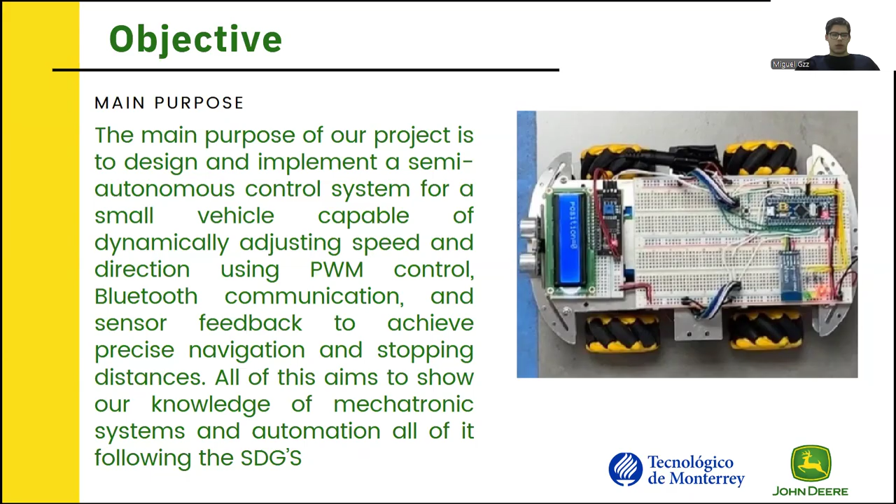The main purpose of our project is to design and implement a semi-autonomous control system for a small vehicle capable of dynamically adjusting speed and direction using PWM control, Bluetooth communication, and sensor feedback to achieve precise navigation and stopping distances. All of this aims to show our knowledge of mechatronic systems and automation, all of it following the SDG number 9.

Some of the challenge requirements as listed in Canvas are that the vehicle design must be a four-wheel scale vehicle using Ackermann or differential steering. The control system must include a speed control, Bluetooth communication, and real-time feedback and distance monitoring. For the automation part, it must have acceleration, cruising, and deceleration phases to reach its target distance. We will talk about this further in the future.

For its hardware configuration, we must use an STM32 microcontroller for regulating the sensors, actuators, and the data communication. It must have obstacle detection when following the triangle path, and it must be able to operate in manual and automatic mode.

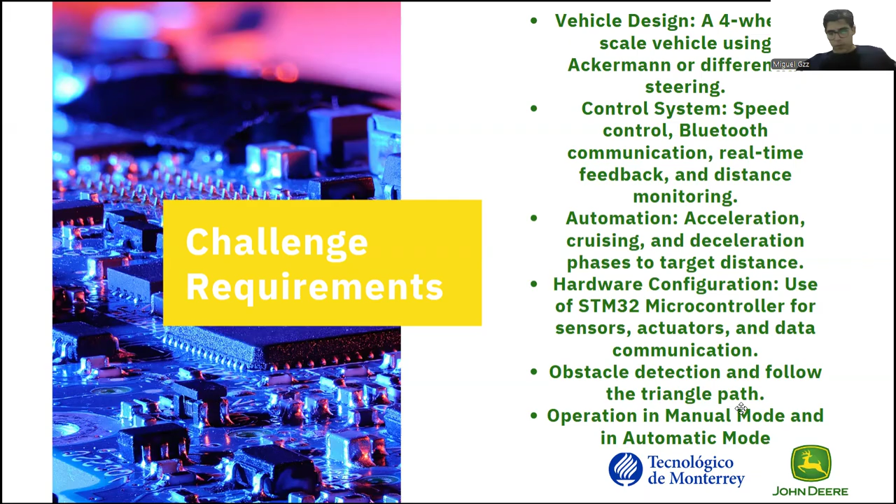So what is the proposed solution? This revolves around the development of a fully autonomous vehicle prototype designed to navigate independently. The system works with Bluetooth communication as well as multiple control loops through speed and direction adjustments. The vehicle operates autonomously in a pre-programmed trajectory while retaining the capability for manual control.

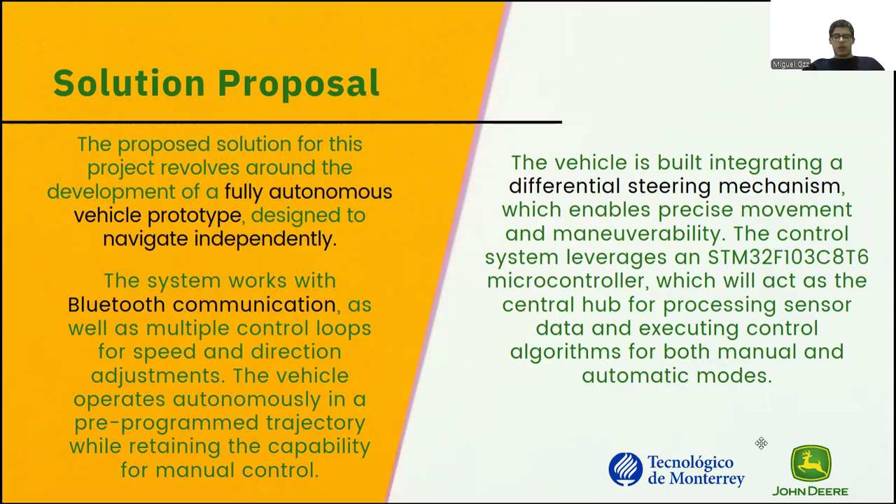The vehicle is built integrating a differential steering mechanism, which enables precise movement and maneuverability. The control system leverages an STM32F103C8T6 microcontroller, also known as the Blue Pill, which will act as the central hub for processing sensor data and executing control algorithms for both manual and automatic modes.

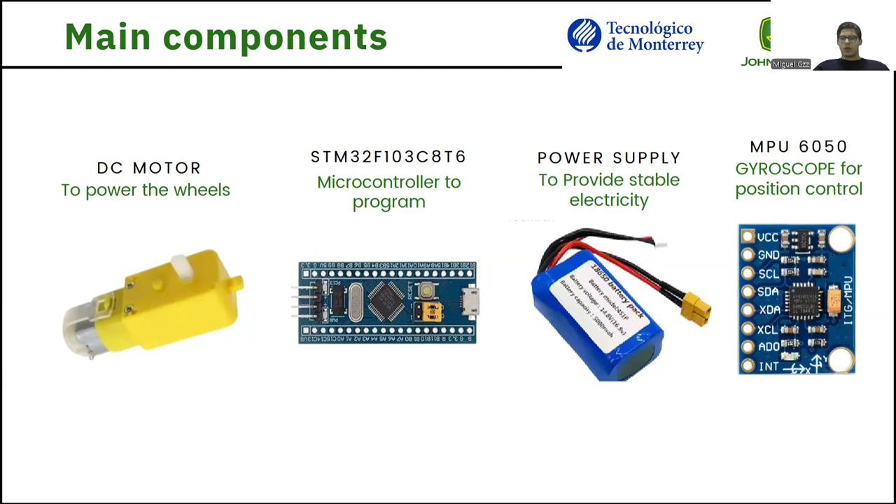We're using an MPU 6050; from the different components it has, we're only using the gyroscope for position control. We're using an LCD display for the display of variables like speed and position. We're using an HC05 Bluetooth module for communication, 2 H bridges to control the 4 motors in the car, one encoder, which wasn't very precise, but we used it nonetheless, and an ultrasonic sensor.

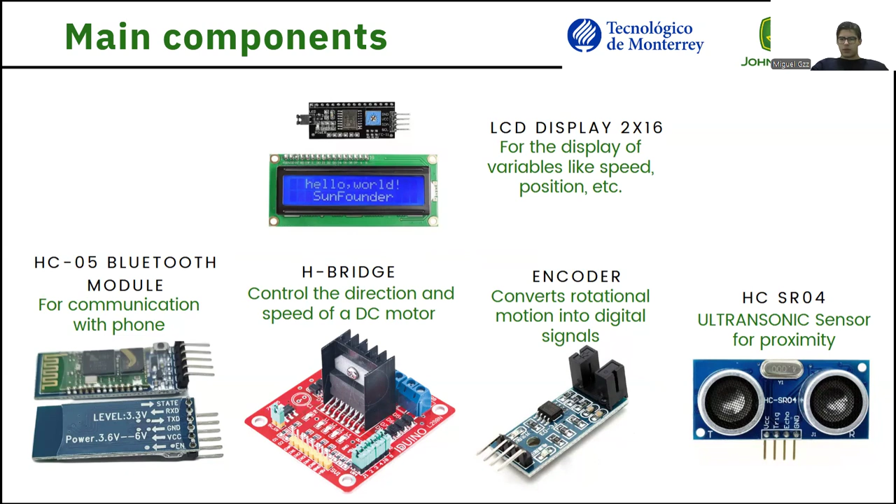This is basically the schematic. On the right side is a representation of the main circuit, for which in real life we actually use 2 protoboards because it's huge. And you can see an example of the connected H bridge, the 2 motors. As I mentioned, we have 2 of those.

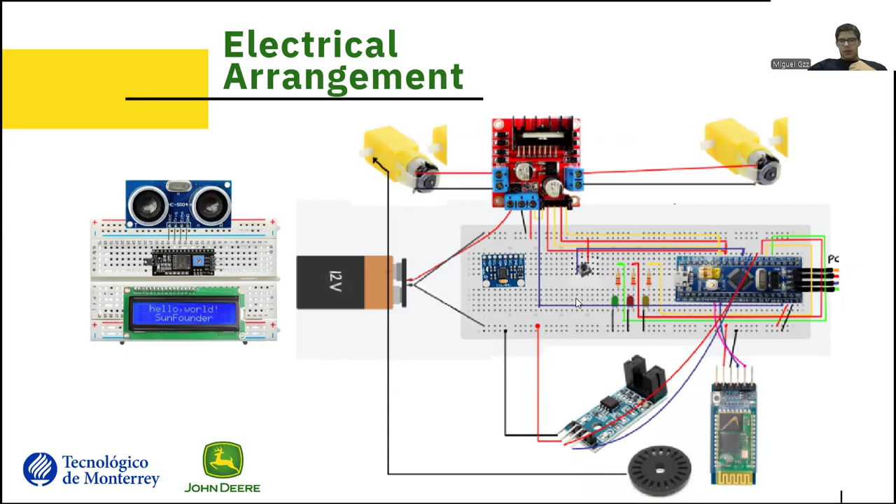Also the encoder, the 12-volt battery, how the 12-volt battery feeds into the H bridge, and the H bridge feeds the 5 volts into the system. We can also see the MPU for direction control, and we can also see right behind me the HC05 module. And on the left side of the screen, we can observe how the ultrasonic sensor and the LCD displays are connected.

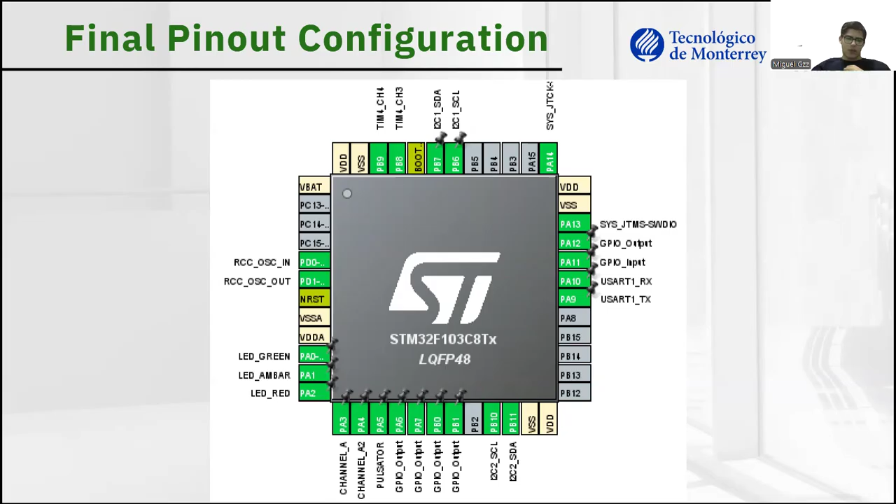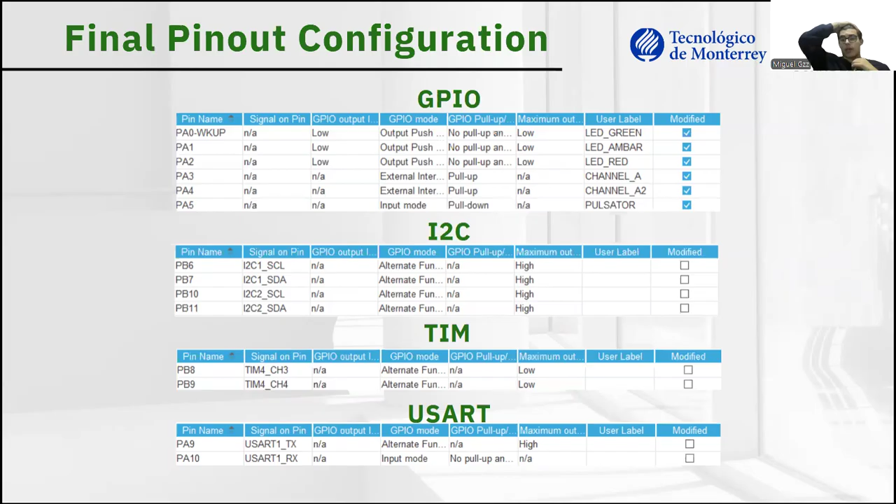This is a pinout configuration. I do not think it's necessary for me to go into detail as to what each pin does, but if you want, you can pause the video and check. These are the general purpose input output configurations for pins A0 to A5, and then the I2C communication setup for pins PB6, 7, 10, and 11. Then the timer configurations using timer 4, channels 3 and 4 for the pins B8 and B9, and the USART communication configuration for pins 9 and 10.

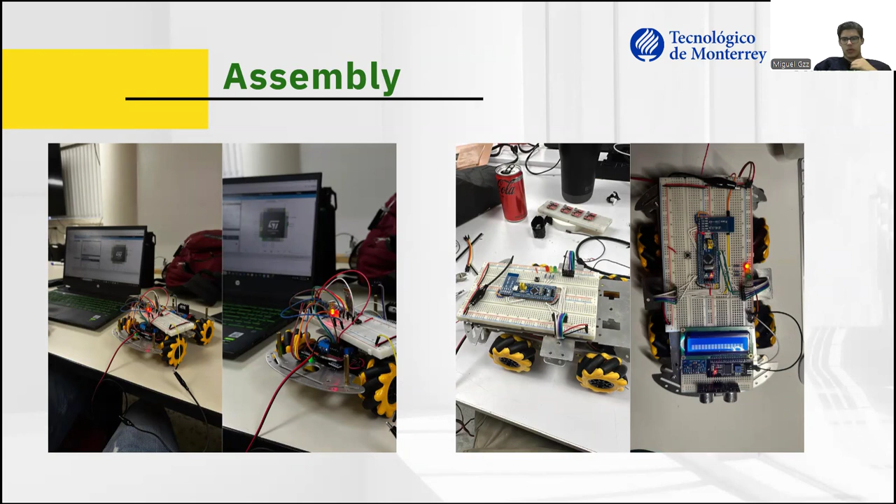These are some pictures you can check for the assembly of the car to kind of match up how it looks with how it's supposed to look. As you can see, we put a lot of effort into it.

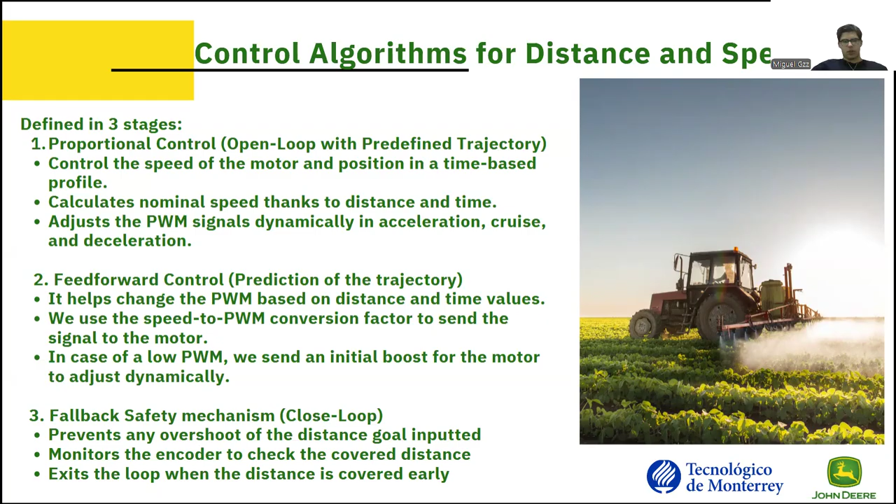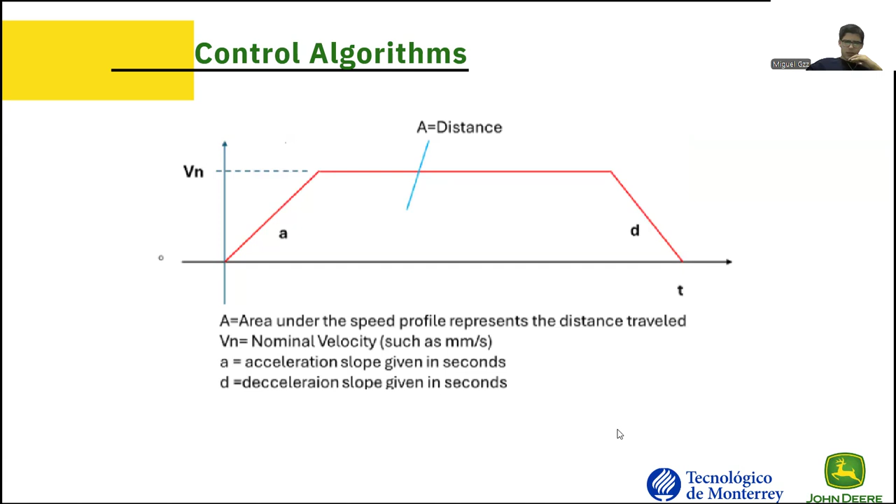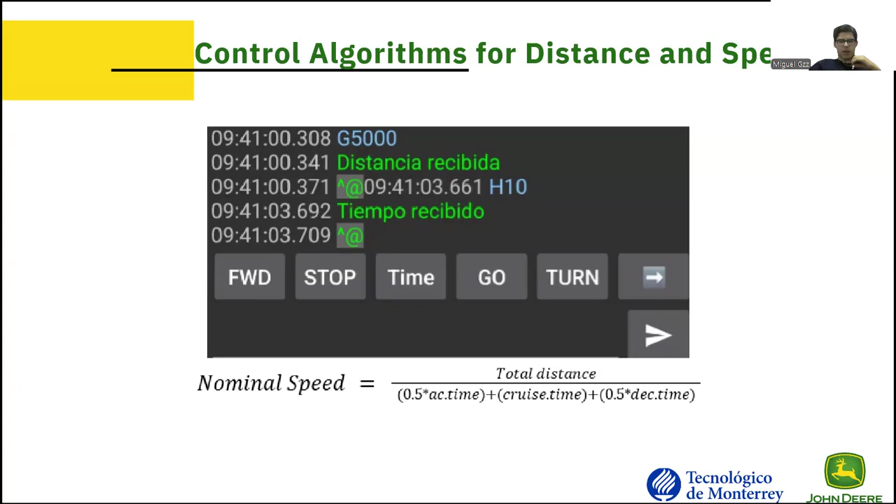For considering this trapezoidal speed profile, this is the formula that we use to determine the nominal speed: the total distance over half the acceleration time plus half the deceleration time, which happens to be the same in this case, plus the cruise time. This is how our trapezoidal speed profile actually looks when graphing the pulse width modulated signal for the motors.

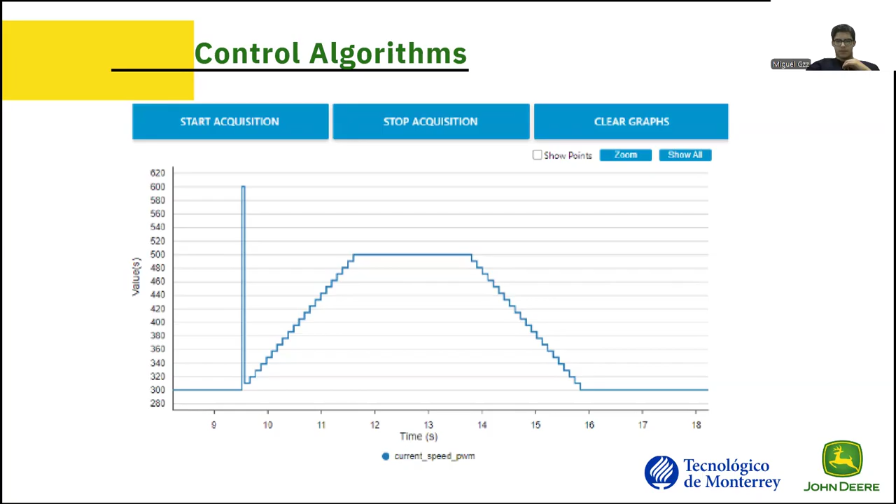As you can see at the beginning, there's a spike, a huge spike. That is in fact part of the program, and it's there with the intention of getting the car to move initially by just giving it a little boost, because we know that it's really hard to get the car moving at such low PWM signals. For example, like 300. It can be very hard to get the car moving, so we give it a little boost. And yeah, as you can see, it's pretty good. Then in here we have some videos which you can check directly with the presentation if you like.

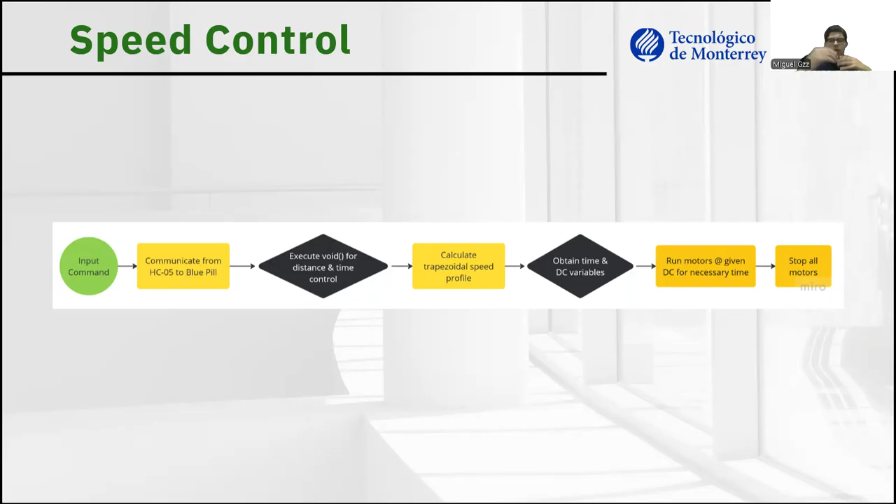This is a brief flow diagram for the speed control. Basically, we input the command, we communicate it from the HC05 to the blue pill. We execute the void for distance and time control. We calculate the trapezoidal speed profile with pure calculations. We obtain time and DC variables to run the motors during the acceleration, nominal speed, and deceleration phases. And then we run the motors and we stop all motors.

And then for the turn control, we have basically the same format. We just input a command for it to turn. It communicates the command from the HC05 to the blue pill. It executes the void for a 90-degree turn. It checks for the north with the MPU module, and then it activates the necessary motors to turn, which in any given case, if it wants to turn right, it will be the left motors, and if it wants to turn left, it will be the right motors. And it turns until the module says 90. If the module says 90, it stops. If it doesn't, then it activates the necessary motors to get to 90.

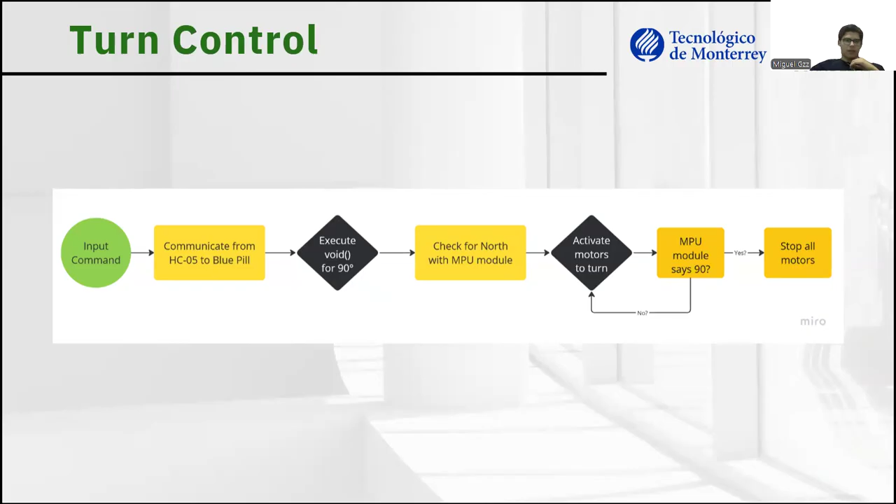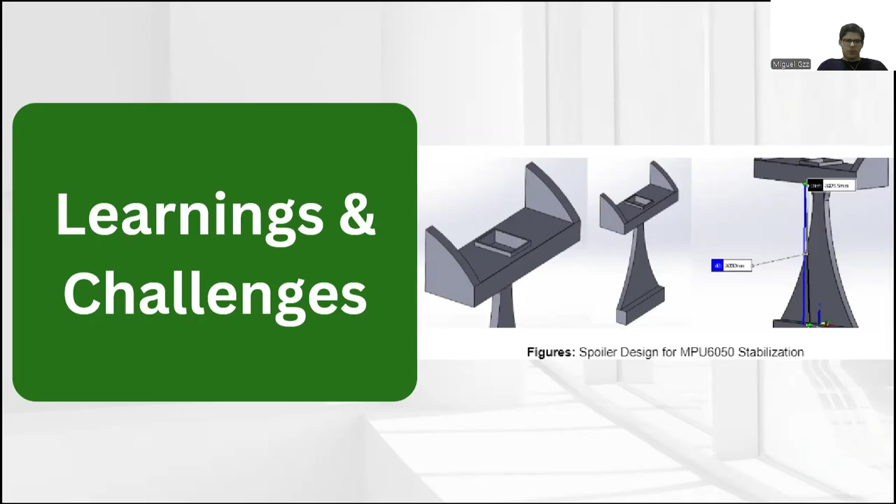We shared a lot of the learnings and challenges in class, but this was a very, very rich learning experience. I mean, talking about the whole semester invested into one single project, it was very tough. There were way too many challenges in the way. It involved many sleepless nights and many failed dreams, but in the end we got it. We finally did it, and we learned a lot about automation, about integrating such different systems, and integrating a lot of theoretical knowledge into a practical project, directly. And yeah, overall, it was a very rich learning experience.